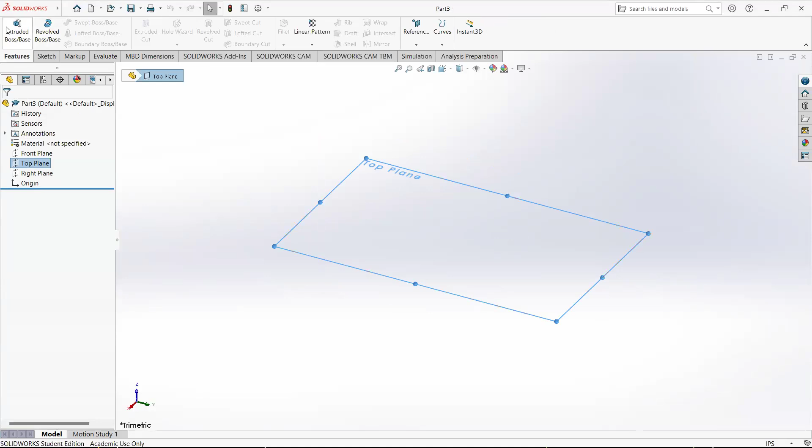So I'm going to start out by creating the parts I'm going to use in this assembly, keeping those fairly simple as well. I'll hit OK on a new part, and on the top plane I'm going to feature extrude, and we're going to stick with circles for now.

Circle, and at the origin, just draw a circle. What I'm looking for is basically a tube. So I'm going to smart dimension that first circle. I want it to be 1 inch.

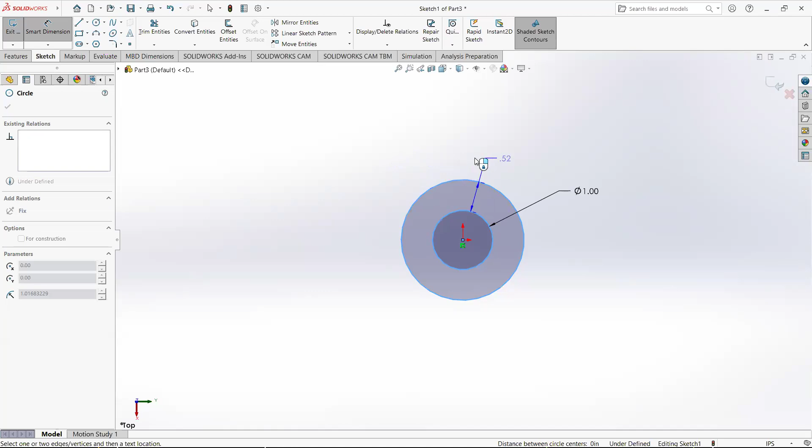Now, rather than define it that way, if what I care about is wall thickness, I can select the inner circle and the outer circle and actually get the wall thickness defined. So I don't have to do the math in my head as to what wall thickness I need to hit, say 50 thousandths of an inch. I can just type it in as the wall thickness by selecting both circles and entering that dimension.

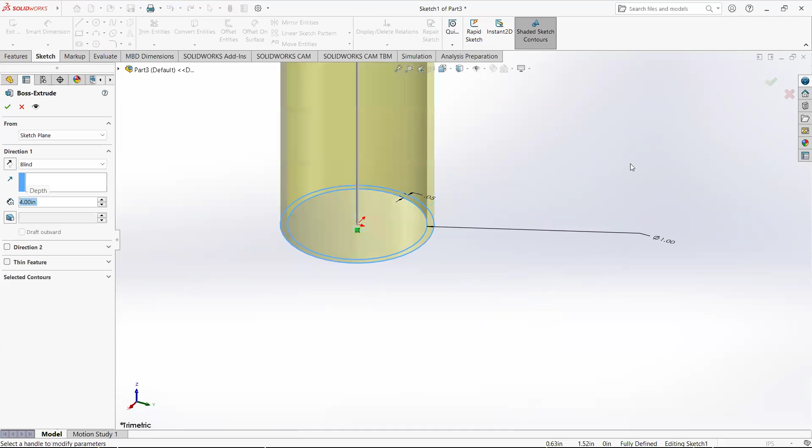So we'll leave it there, 1 inch diameter, 50 thousandths wall thickness. What we're really looking for here, let's go 4 inches long, this is going to end up being the body of an air cylinder. For now I'm going to leave end caps off. We can certainly put those in if we want more detail, but for this demonstration this works just fine. So I'm going to go ahead and save this as body.

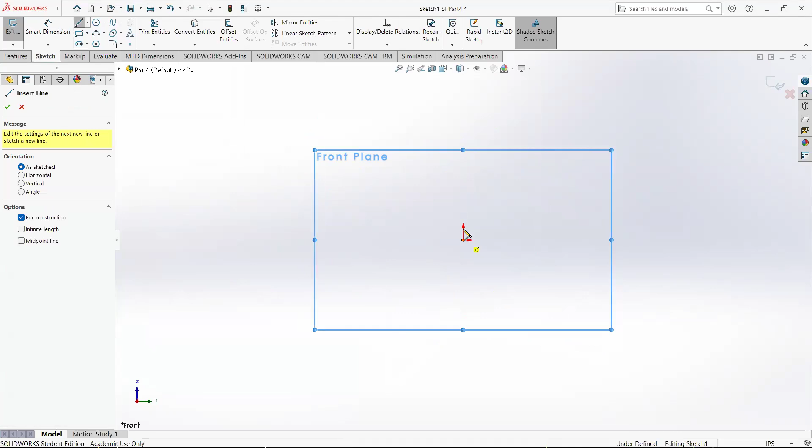Then I'm going to create a new part for the cylinder rod. On the front plane, I'm going to do a revolve because it should be a little faster. Let's do a revolved boss. First I need a center line. We'll make that infinite length, and make sure it is coincident with the origin.

Now I'm going to go ahead and draw my cylinder rod with piston. We'll start at the origin, come out here, come down a little, and just make it a very, very simple cylinder rod. Here.

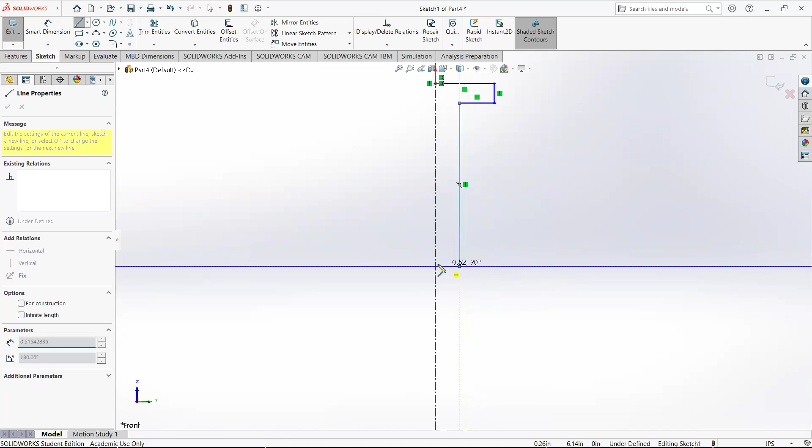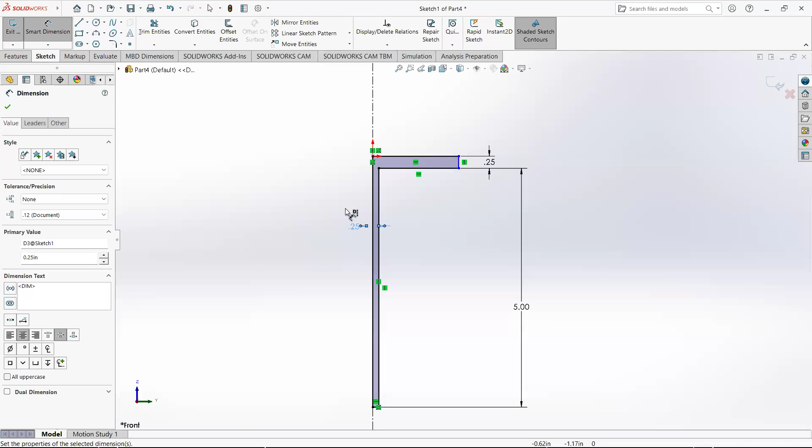Now our body was 4 inches, so we want the extending part of the rod to be a little longer than that. Let's go 5 inches, so that it sticks out when it's fully returned. We can give it a quarter inch for piston thickness, and let's go ahead and give it a quarter inch for rod diameter. Fairly weird proportions, but for the sake of showing you how it works, this will work.

So let's save that as rod. Now I'm going to bring those into an assembly. I'm going to create a new assembly.

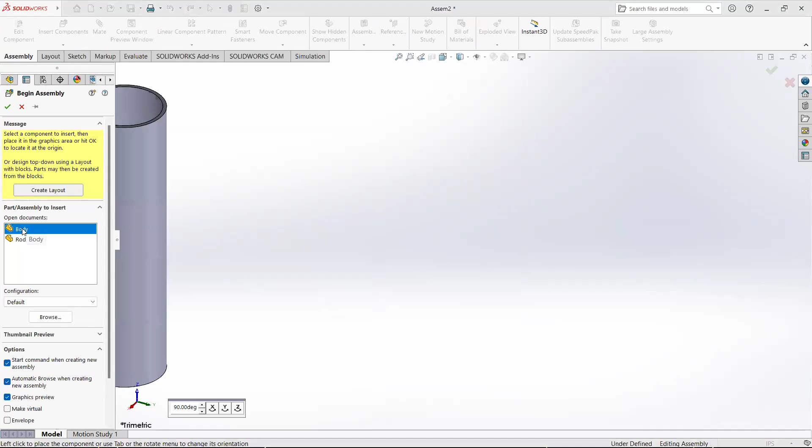The first part I insert will be the body, so I click it from my insertion menu and drop it in. Again, the first thing I want to do is float it, because I don't know where this part landed - I just kind of clicked it in space. So I'm going to float it. Then I'm going to select it.

I'm going to mate. Now in my model window, I'm going to expand the tree here and just mate the origin of the body. First I need to deselect, so clear mate selections. Select the origin and the origin. Oh, you are locked. Why are you locked? Cancel. Mate.

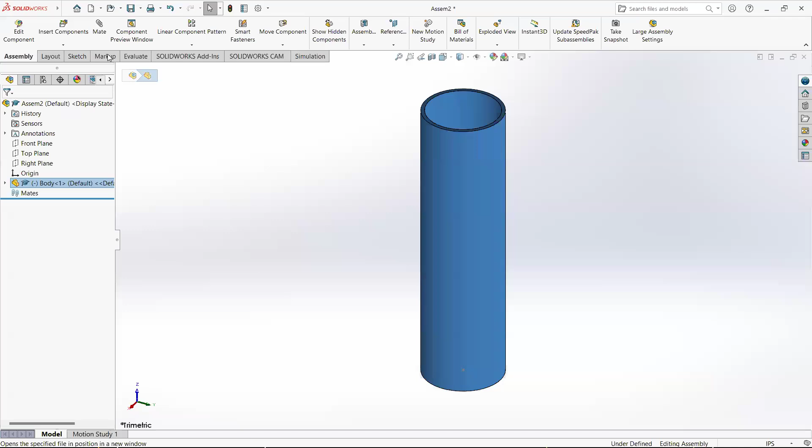We selected first, so mate... there we go, origin. We need to not have that part selected first when we hit mate. It automatically goes coincident, align axis, which is what we want. I'm going to accept it with the green check mark.

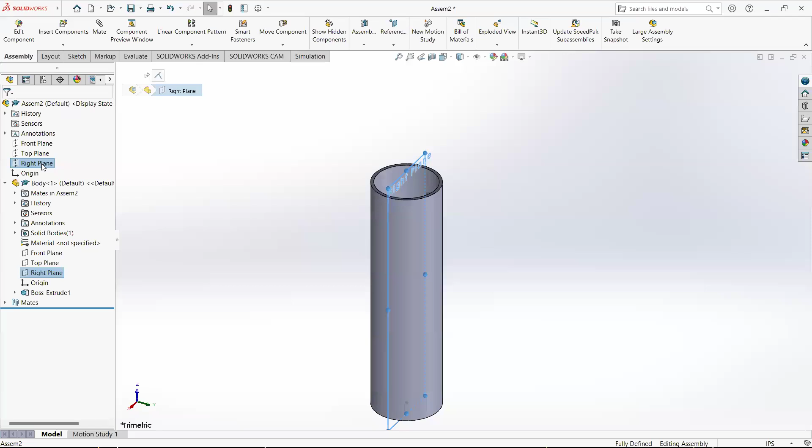I'll accept it again. Now, I would normally stop this thing from rotating, but in this case it doesn't really matter. Normally I would grab, say, the right plane here and the right plane of the assembly and mate those, which is just one button click. I want them coincident, and now it's just locked down, right? My minus sign is gone. This thing can't rotate anymore.

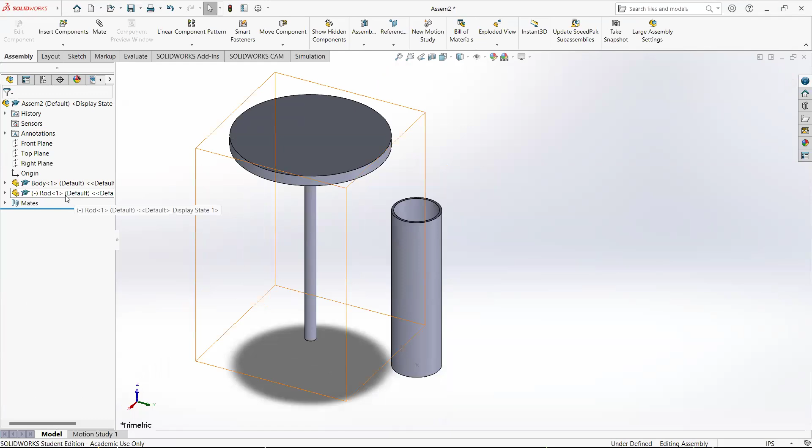So now I can insert the rod, and I will just drop that in, and that is nowhere near proportional. I must have messed up a diameter somewhere. So let's right click, edit the part. I can edit it right in the assembly.

Let's save the assembly, call it cylinder. Yes, I know it's not mated yet, but we are now editing it so I can edit the sketch that goes with that revolve. Yes, that's okay.

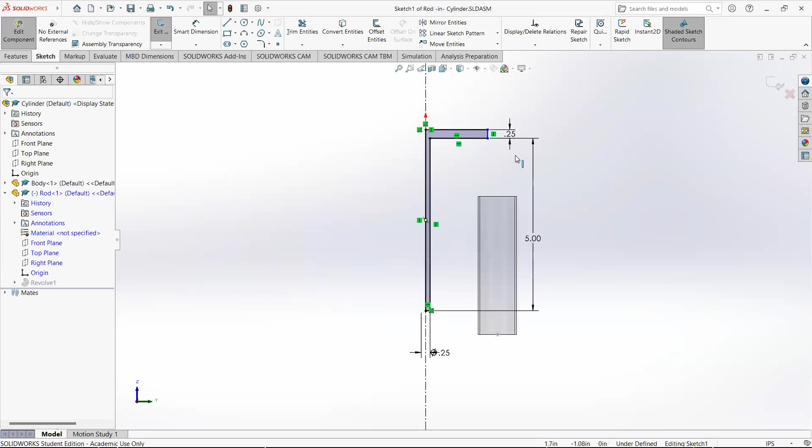Oh, I didn't define the diameter at all. That's handy. Smart dimension, a 1-inch diameter because that was our cylinder bore. That would be why our proportions look a little off. So accept those changes to that part.

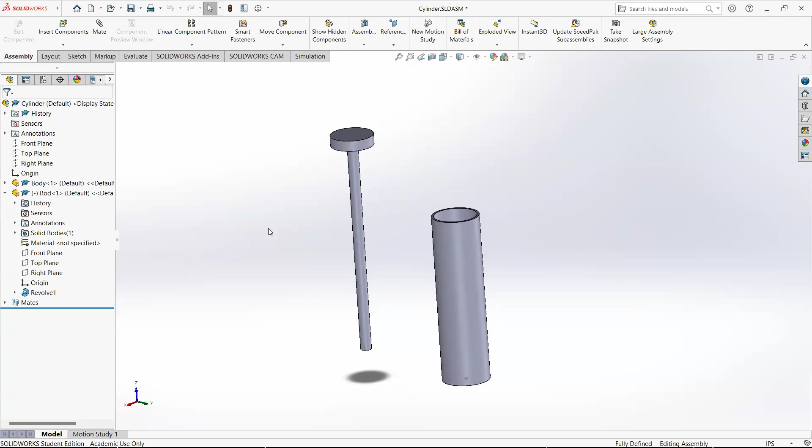Now is the time to mate. The first mate, and now I'm going to mate this in such a way that this cylinder rod can actually extend and retract. Very handy in a lot of cases in assemblies with parts like air cylinders that actually move. So for the first mate, I'm going to hit mate, and I'm going to select the piston diameter, and I'm going to select the bore.

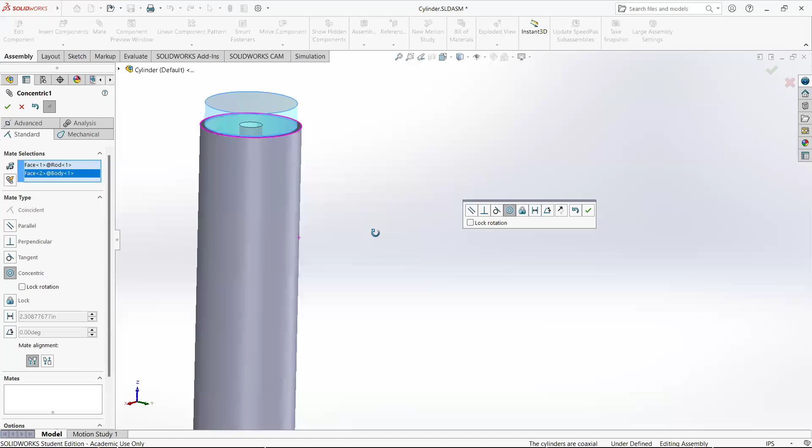And it automatically wants them to be concentric, because when you select two diameters, that's sort of what SolidWorks assumes you want. The problem is, in my head, this rod should be pointing up. It's not a huge deal because we could always make it point down, right? It's symmetric in this model.

But in order to get that flipped around the way that I had it pictured, over here in my mate properties I have a mate alignment option toward the bottom. If I click that, it'll automatically flip that rod upside down, or at least reverse from what it assumed I wanted. So that's a quick way I can go back and forth, to sort of flip some of these mates around if SolidWorks brings it in a way that you don't think it should.

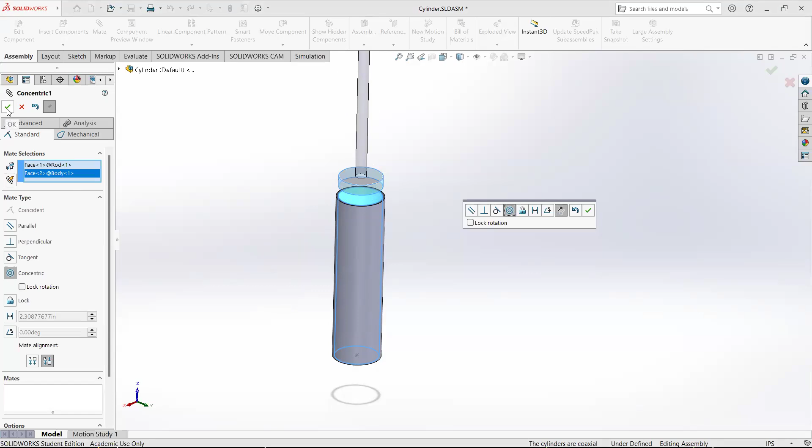So I'm going to go ahead and accept that with it flipped. And now I've got it concentric, so I can drag it up and down, but it'll never leave sort of the center line of that cylinder.

So now, what do I do to make it so that... well, I could, I guess, leave it like this. Problem is, it's not going to stop at the end. Now, this air cylinder would typically have end caps, right? I can't go back further than the body, and I can't extend further than the body. So what can I do to sort of block this from happening?

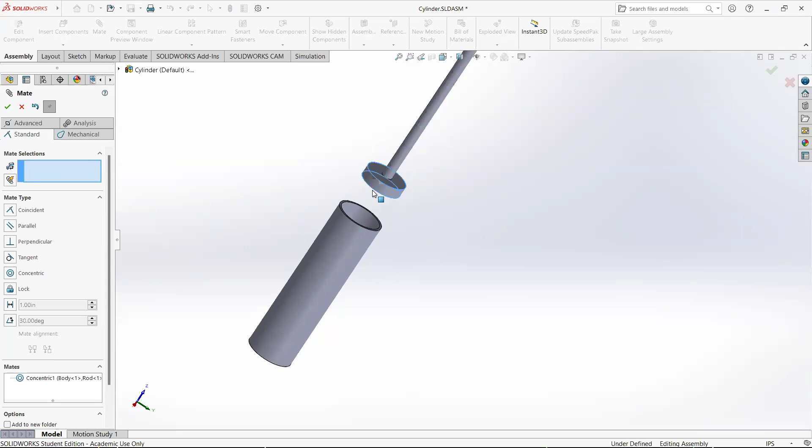Well, there's a couple of things. The simplest way, I'm going to bring this down so that it's at least in the body where I want it. The simplest way is an advanced mate. And under advanced mates, I've got all kinds of fun things, like for instance width, which comes up a lot.

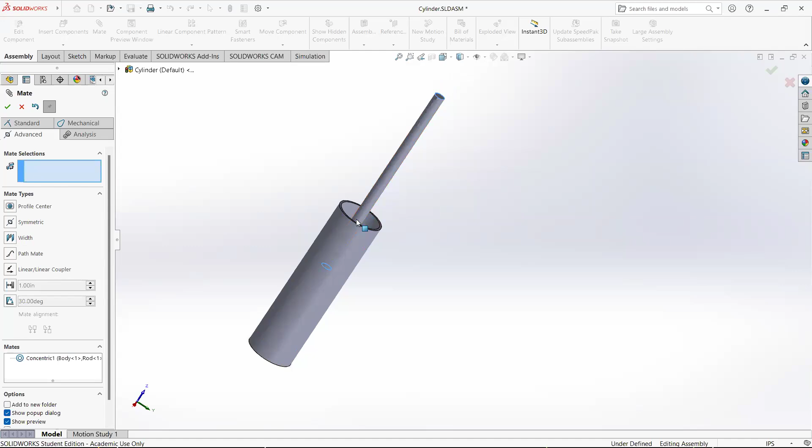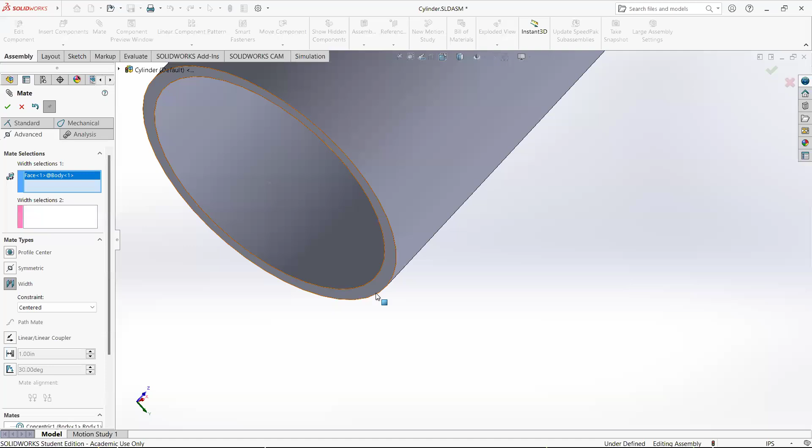Width is a good mate when you need something to be exactly centered. So if I wanted this rod to be locked so that it's sort of in the middle always of the air cylinder body, I could select width, and it's going to want two parallel faces from two different parts. So the first one, I would select the ends of the body, that flat face, and the other end, right? And notice the blue selection dropped, so it's happy, it changed.

Now I'm going to select the faces of the piston. Notice it slid just a little bit, but if I go out so we can see the highlighting, the pink is the piston selection. And now if I accept it, that rod will be forever locked to the middle. That's what a width mate does. It locks it between two flat surfaces, so it'll be exactly centered. I don't really want that, though. I want it to be able to move.

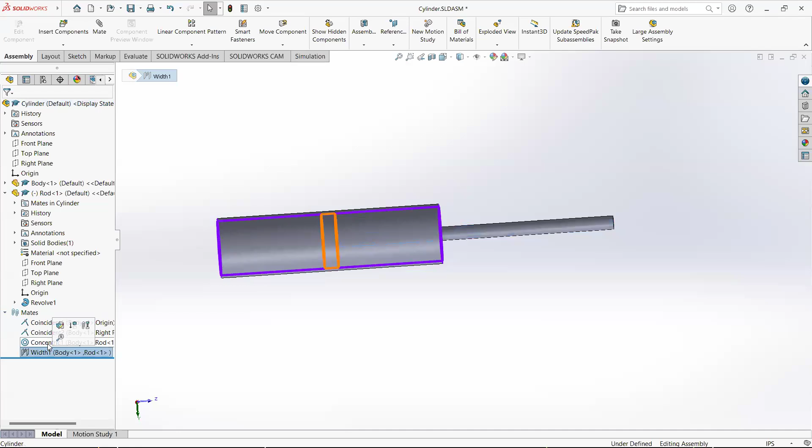So I'm going to delete the width mate. Just delete. And now I can go back to sliding in and out, right? But again, I need it to stay in the body. So if I select mate, I've got some other choices. For instance, under advanced, I select this distance mate.

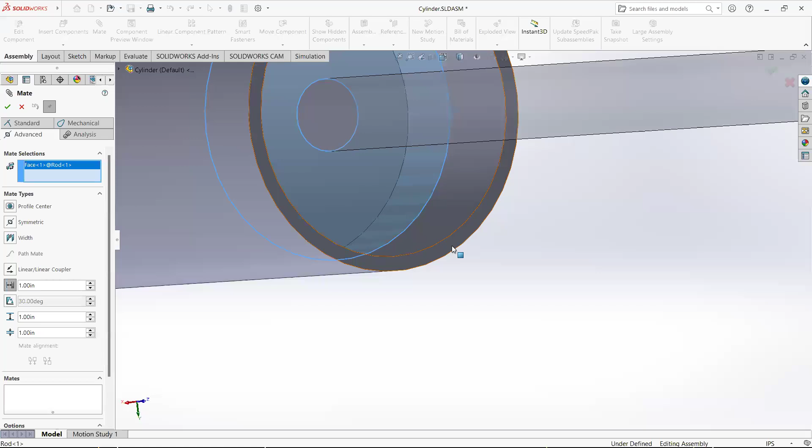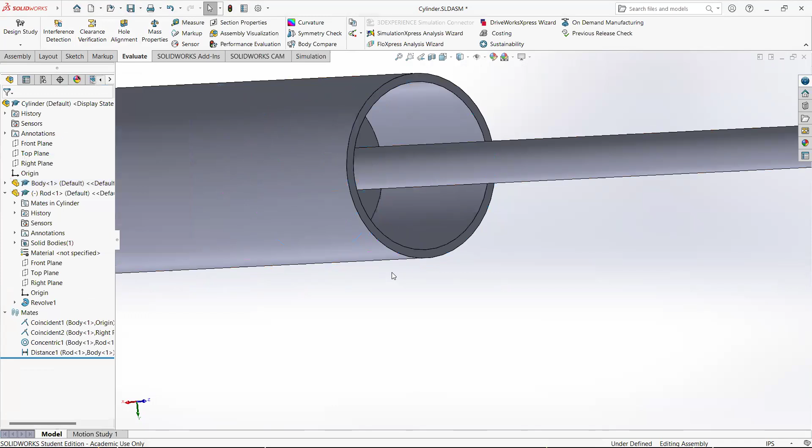So if I select it, and right now, if I just select this face and the top of the body, 1 inch was in here. So if I look, I can actually prove it. So I will accept. If I select this and use my evaluate measurement and expand my little window here, they're 1 inch apart, right? Normal distance, center distance, 1 inch. So that mate, the distance mate, by default sets a distance.

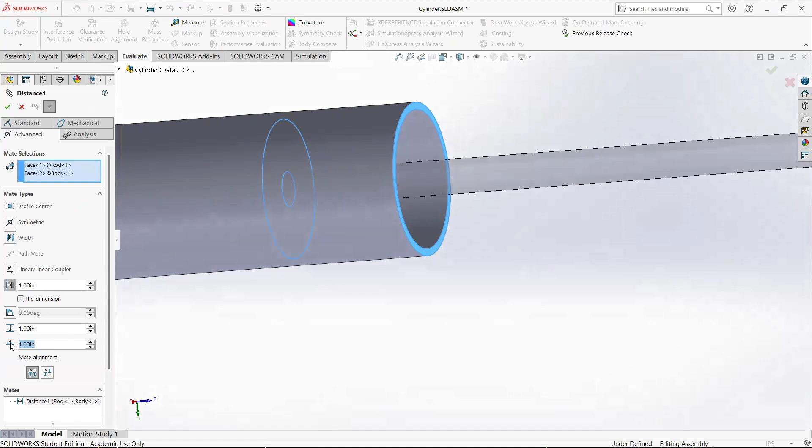What I can do though, if I go in and select edit feature on the distance mate itself, under advanced, I have a min and a max here that I can set. So minimum, I set that to 0. And I was 4 inches long on my body. This is where some math comes in when we use this mate type. I was 4 inches long on the body, a 1/4 inch tall on the piston, so 3.75 should be where we want. I'm going to accept this.

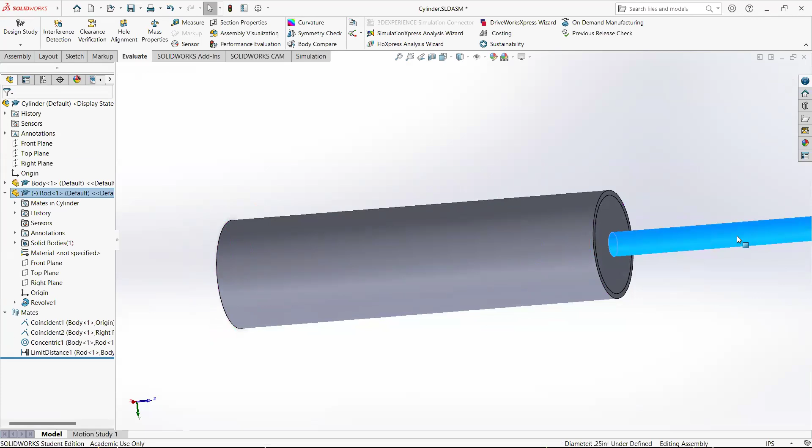Now, with a minimum of 0, that's saying that it can't go past 0, so it will stop. I'm dragging, and I can't get it to drag out of the cylinder anymore. Likewise, I told it the furthest away that it could be is 3.75. And notice it stops, and I'm dragging back and forth, and I can't go past the bottom. So the distance mate with a min and a max is perfect for this kind of application, getting an air cylinder that actually moves and follows the rules, that doesn't try to blow through the parts that are on the end.

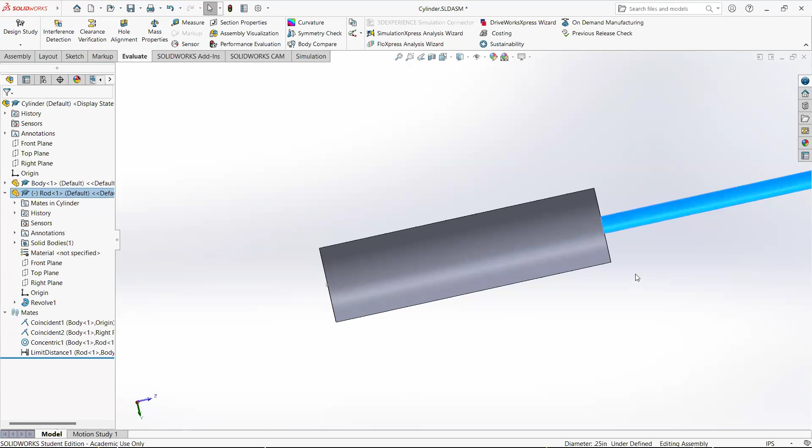So real quick, like I said, I promised it would be sort of quick and dirty. We can do the same thing with other mates, by the way. Assembly, mate. I'm just going to show some of the other types under advanced. We can do the same sort of thing with angles. If I have an angular mate, I can set a min and a max. If it's a joint, for instance, that rotates, I can do it that way.

We also have some options, not so much in this case, for the way things would move in an actual assembly. So there's cam mates. The slot mate is especially effective for when we need a pin to follow a slot or a roller to follow a slot. But these are mates that allow these parts to actually move.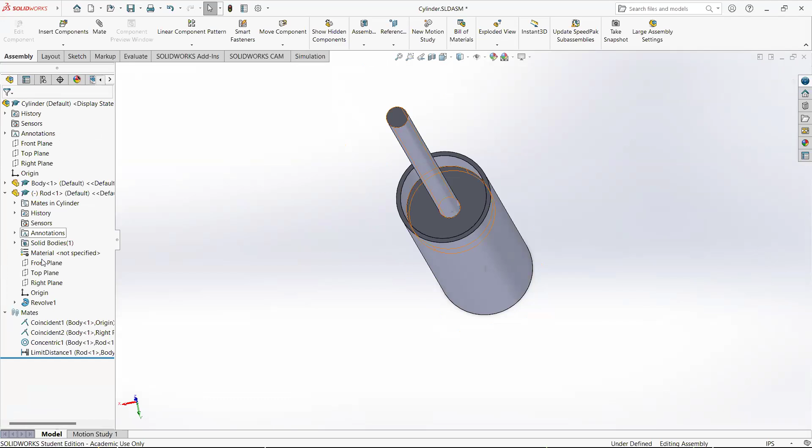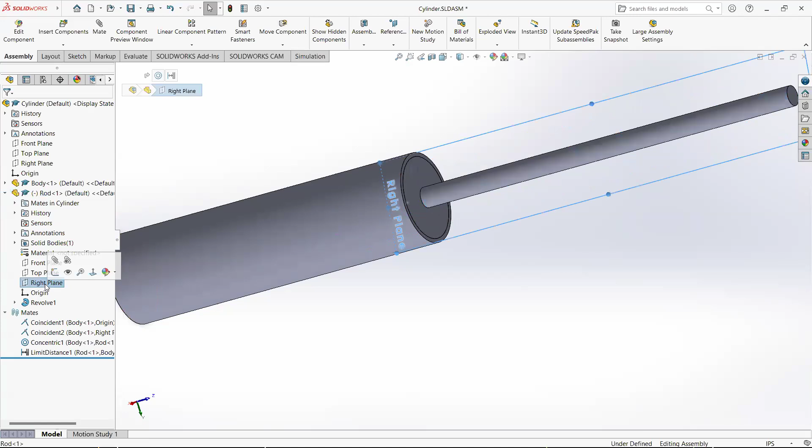I'm going to go ahead and get it fully constrained, because the minus is there. Let's stop it from rotating, because again, I didn't lock it down. It's tough to tell in a round part, but I'm rotating it as I drag my mouse in this direction. So let's grab the right plane of our rod and the right plane of our assembly, and notice they're at funny angles. If I mate those, and it's coincident, which is what I want, let's accept the mate. That'll stop it from rotating.

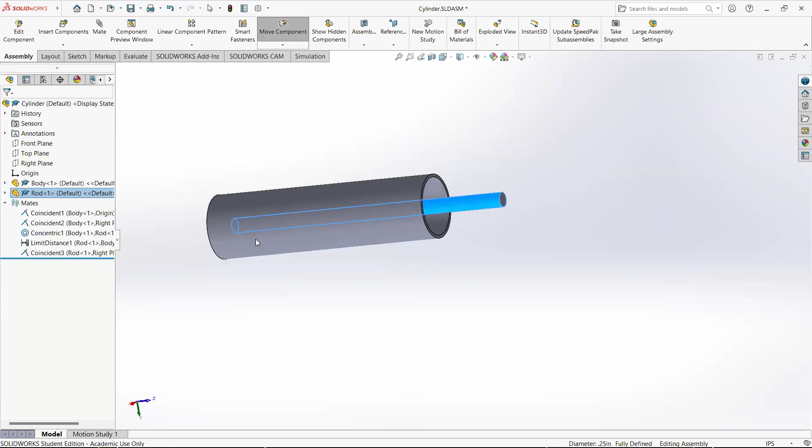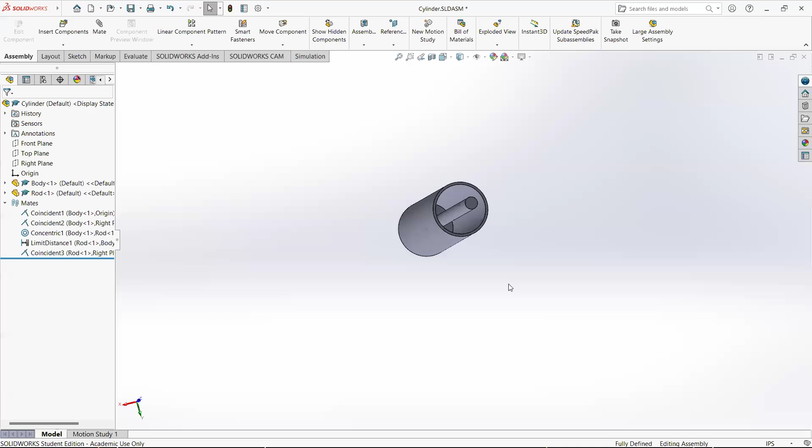And notice, even though I can still move the rod, the minus sign is gone because this is fully constrained. It's fully constrained, but it can still move, because we have defined minimum and maximum stroke, minimum and maximum distances from the end of the cylinder cap. So that is a pretty effective way to get pieces in your assemblies that can actually move somewhat true to life. Especially handy if we're designing an entire machine in SolidWorks and we need to see how things react when they move.